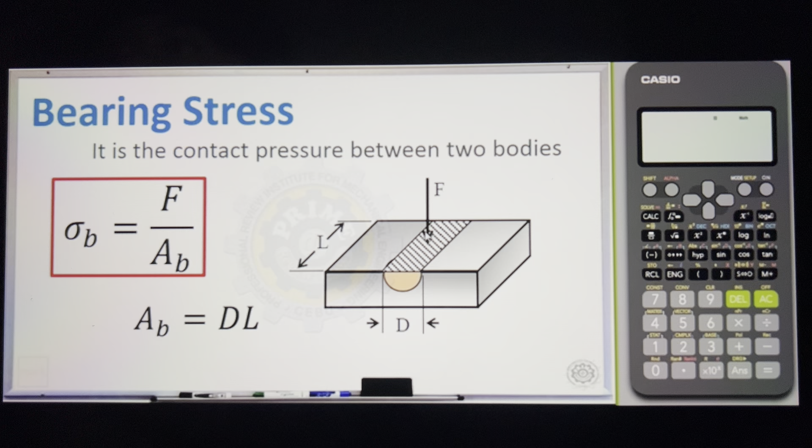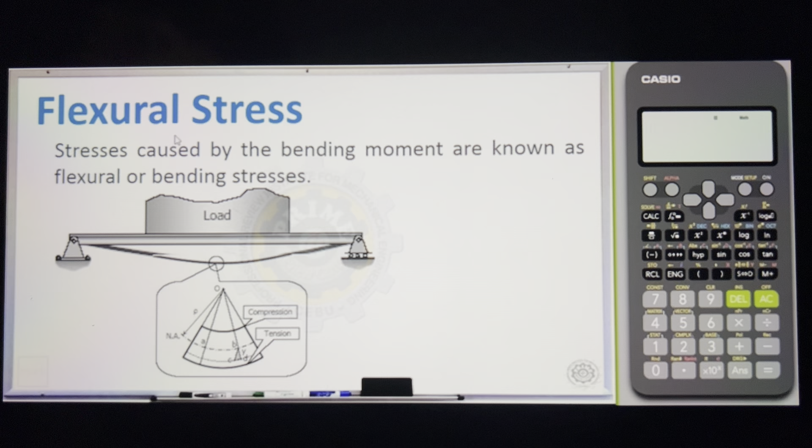Now let's move on to flexural stress. Another term for flexural stress is bending stress. It is the stress caused by the bending moment, also known as flexural or bending stress. So when we have a load here and our shaft bends, you have compression here, then tension at the other end.

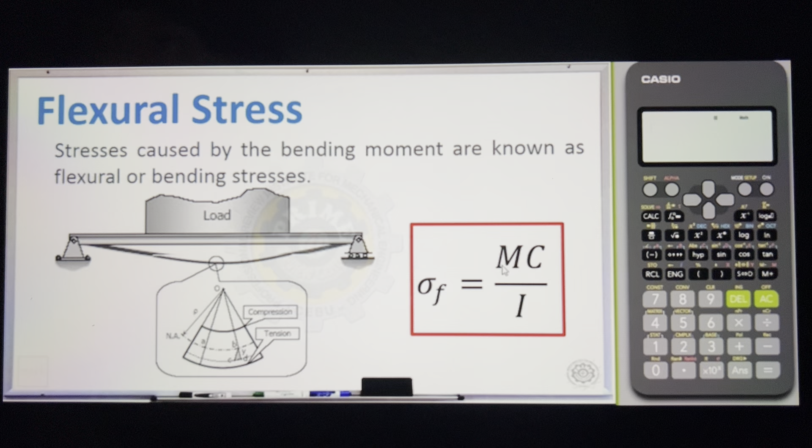The general formula for this setup, for flexural stress, is MC over I. This is the formula we'll use every time we encounter flexural stress. Let me elaborate on its parts. When we say MC over I, the M should be the maximum bending moment. The C is the distance from the neutral axis to the outermost fiber. And the I is the centroidal moment of inertia.

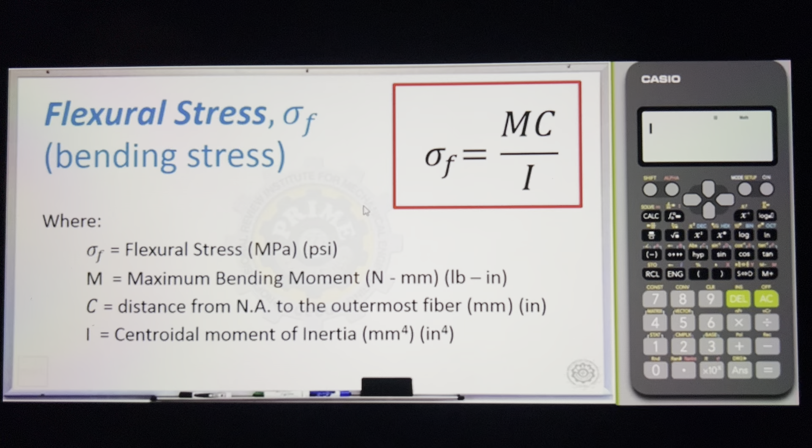It depends on the given, because the common given we expect is circular shaft or rectangular — those are the cross-sections we most often encounter. So for a solid shaft, our C, defined as the outermost distance from the neutral axis to the farthest fiber, is from the center to here — that's the definition of C. Mathematically speaking, C is the radius, which is diameter over 2.

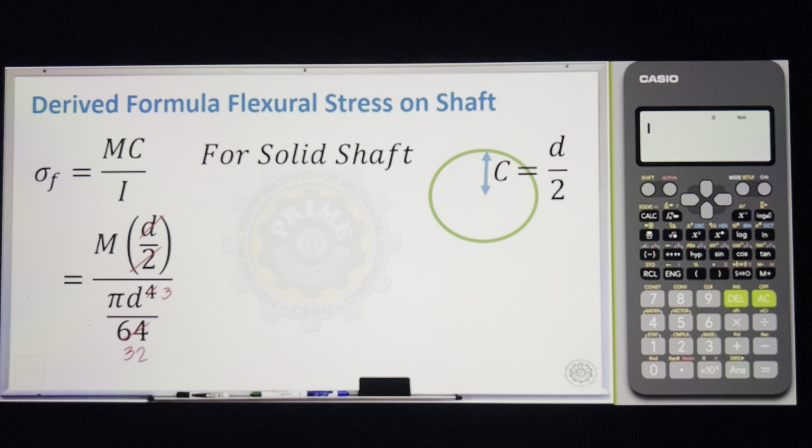The I of a circle is pi d to the 4th over 64 — please memorize this. If you simplify that, the diameter cancels out and becomes cubed, the 2 cancels out and becomes 32, and simplifying further raises it. So the formula we should memorize is 32M over pi d cubed.

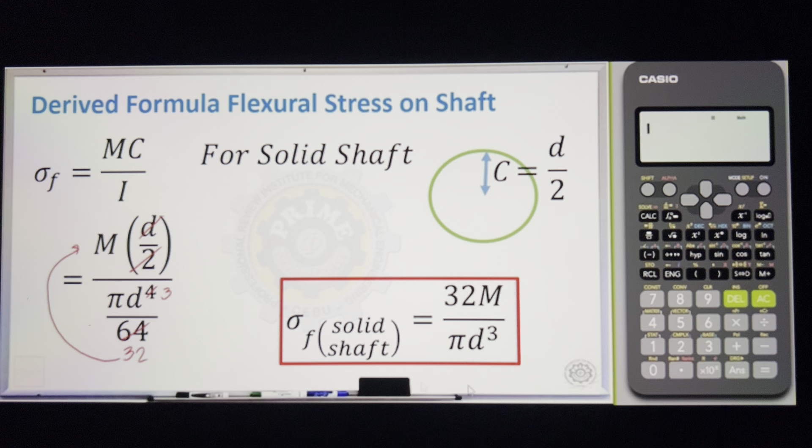So for circular cross-section, 32M over pi d cubed. For rectangular, 6M over BH squared. That's the concept of bearing and flexural stress.

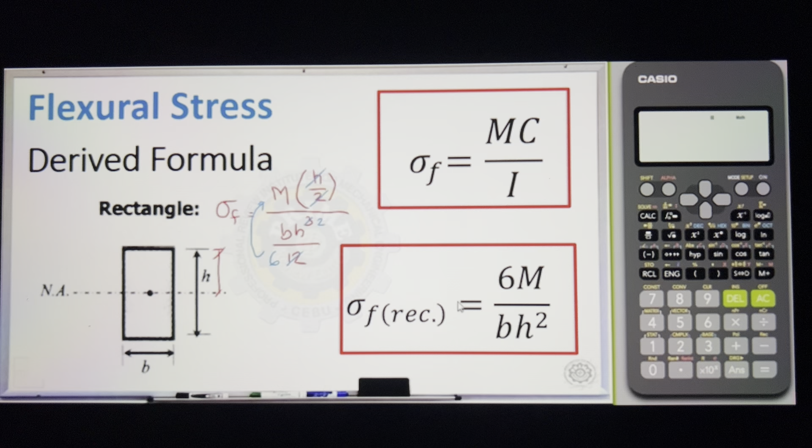Let's do a sample problem. Problem number 1: A simple beam, 8 meters long, carries a concentrated load of 100 kilonewtons at the midspan. What is the maximum moment of the beam?

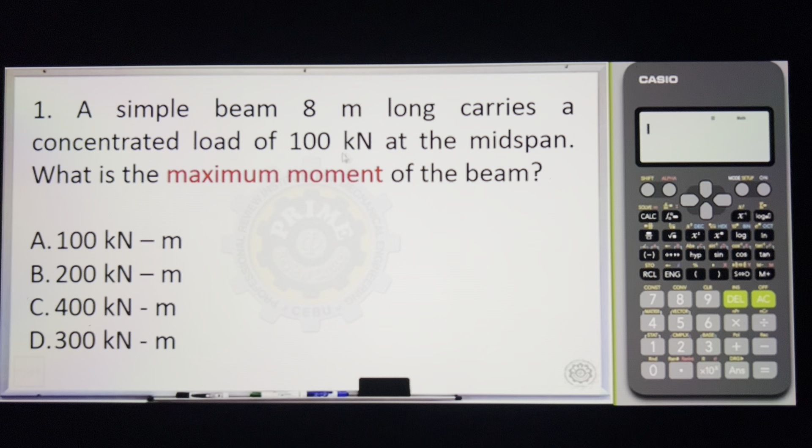For this kind of problem, we can solve the maximum moment using a shear and moment diagram. We need to visualize: you have a beam, 8 meters long, with a single concentrated load at the center, valued at 100 kilonewtons. So this is the illustration.

First, we need the load diagram. Since this is a simply supported beam, we have reactions on both ends, left and right. Applying logic, since the problem shows a concentrated load of 100 kilonewtons alone at the center, that means if there's support on both sides, they share it equally. So this must be 50 kilonewtons and 50 kilonewtons to balance.

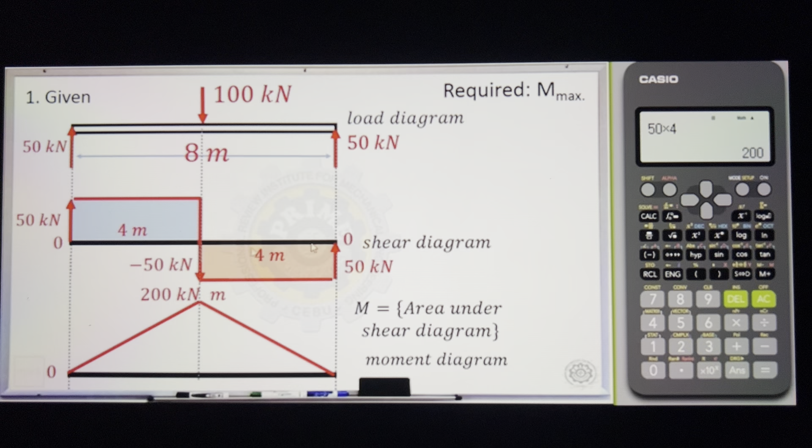Ang concern lang naman natin is the maximum moment. Nangyayari yung maximum moment under 0 shear. Kung titingnan niyo yung shear diagram natin, andito yung 0 shear, kaya katapat niya yung maximum moment. So, by observation na lang yan, ang maximum moment is 200 kilonewton meter.

But wait, there's more, kasi medyo mahirap ito eh. Kailangan lagi kang marunong ng load, shear, and moment diagram. Tapos mag-a-analyze ka pa ng 0 degree, first degree, and so on. So, it requires practice talaga. Pero pag natutunan, paulit-ulit lang naman yung principle ng shear and moment diagram. Kaya lang, ang other solution dito is simply memorize the shortcut.

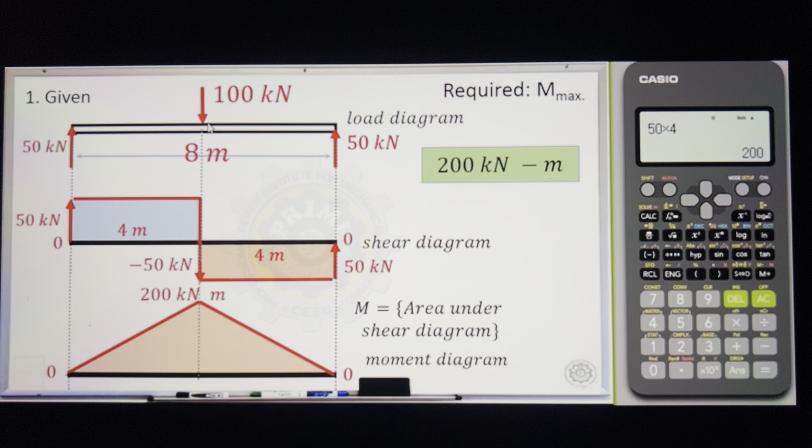Kasi yung mga common loading, may mga shortcut na yan regarding sa maximum moment. For example, you have a simply supported beam, tapos merong load sa gitna. Very common yung ganung loading. So, instead na mag-shear and moment diagram, tandaan mo na lang yung shortcut. Merong shortcut yung force na nasa gitna, tapos yun lang yung given.

So, tandaan natin is FL equivalent sa 4M. Okay, so palatandaan ko dito, pagkain foot long for me. Ayun yung palatandaan ko. Anyway, you can create your own coding. Bottom line, FL over 4. So, pag sinubstitute natin yung force na 100 kilonewton, yung length na 8 meters, divide mo ng 4. Makukuha nyo rin yung same result na 200 kilonewton meter.

So, pag may mga ganitong problem, mas magandang kabisaduhin na lang yung shortcut. Magagamit mo yung FL over 4 kapag yung load nasa gitna lang.

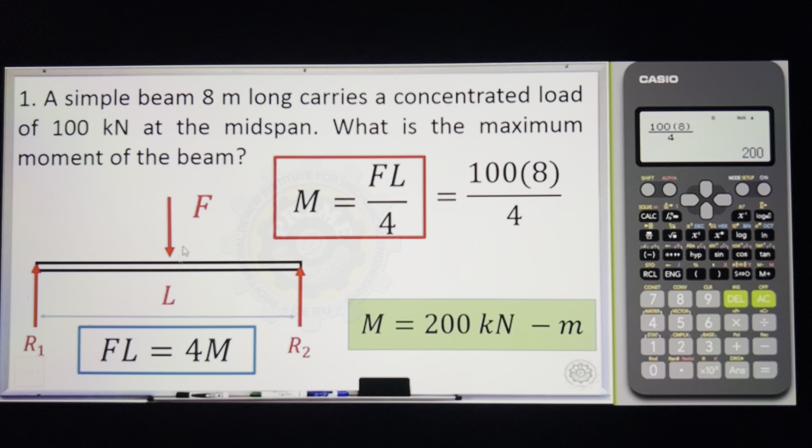Okay, ipakita naman natin yung other summary ng mga formula regarding sa maximum moment para hindi na tayo mag-shear and moment diagram. Ito yung katulad kanina na yung load nasa gitna. Ang formula natin is FL over 4. Nagkataon lang yung force is represented by variable P, kaya naging PL over 4. Kaya ang slope niya is PL squared all over 16 EI. And then, this is a derived formula para sa maximum deflection.

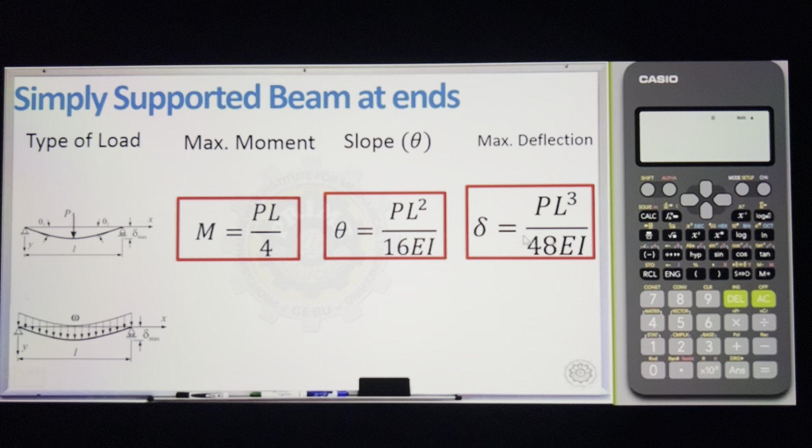Ngayon, ang madalas itanong is maximum moment, pero pwede rin tayong tanongin ng deflection. So, make an effort, i-kabisaduhin yan. Pag uniform loading naman, omega L squared over 8. Then this is for theta, and then this is for deflection. Again, focus tayo dito sa ating maximum moment.

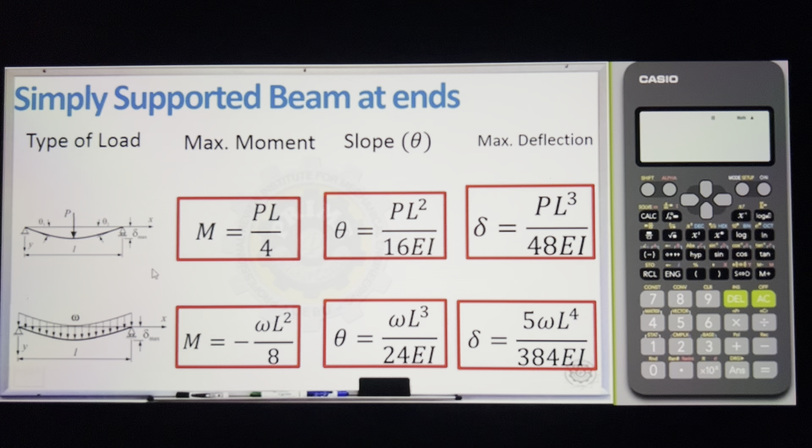Next, so pwede natin itong kopyahin, isulat sa index card para meron tayong summary. Now, what if meron tayong cantilever beam? Kapag cantilever beam naman, ito yung mga formulang kakabisaduhin. Again, pwedeng tandaan muna for the meantime yung maximum moment.

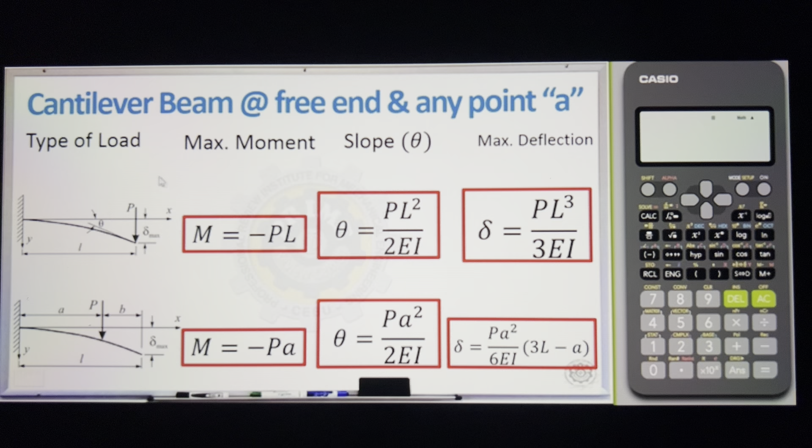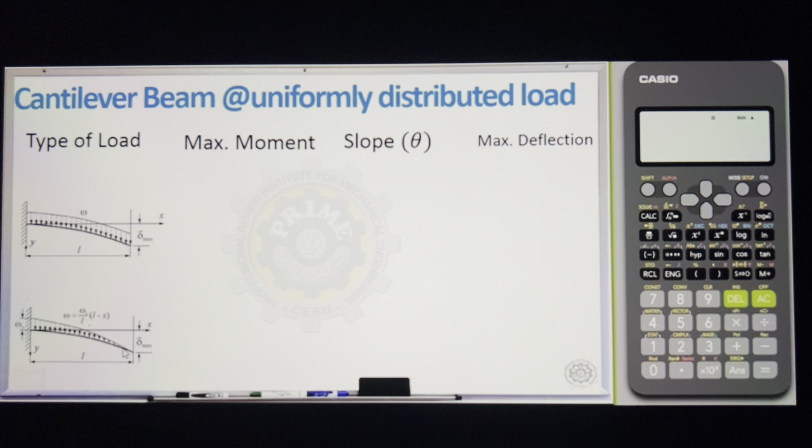Next, paano pag may cantilever beam tapos may uniform loading? Pinagsama-sama na. So kapag uniform loading na rectangular, ganito shape. Pag ang ating loading is triangular naman, ganito yung shape. So these are the derived formula. Again, dito lang muna tayo sa maximum moment.

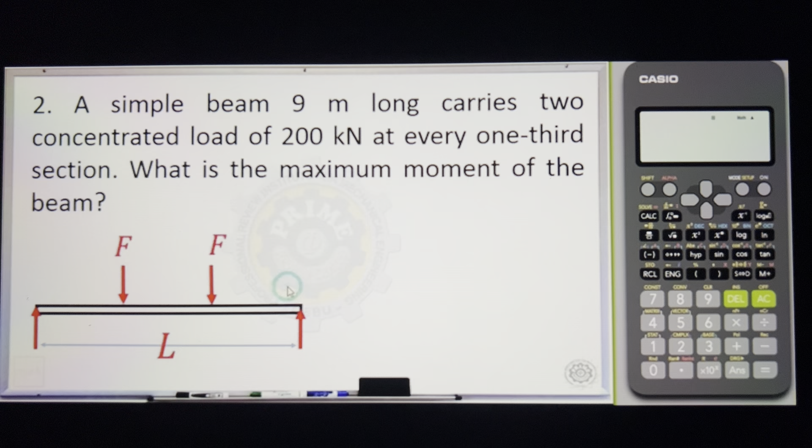Okay, sample problem tayo, number 2. A simple beam, 9 meters long, carries 2 concentrated load of 200 kilonewton at every 1/3. What is the maximum moment? So pag may nabasa kayong 2 load, nangyayari every 1/3, ang shortcut niya, FL over 3.

So, hindi ko na ipapakita yung shear and moment diagram, matagal. Tandaan lang yung shortcut. Magagamit yung shortcut na to para sa ganitong loading. Direct sub na lang. So, you have 200 multiply sa 9. 200 yung force, 9 yung length. Divide mo lang ng 3. So, ang maximum moment should be 600 kilonewton meter. So, this is problem number 2. Sobrang dali dahil may technique tayo, shortcut.

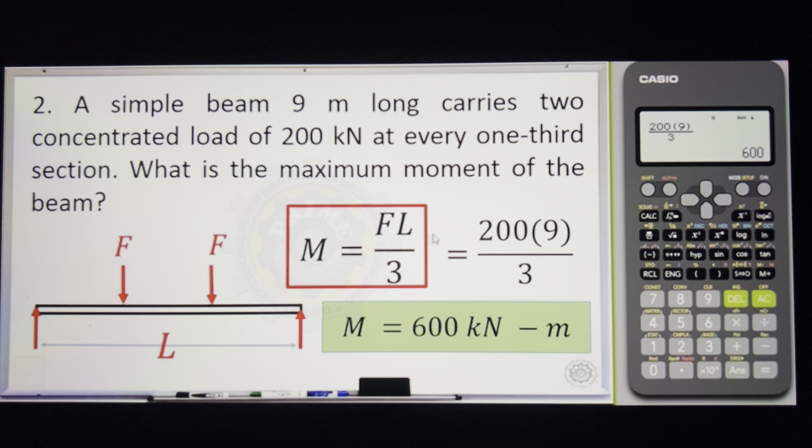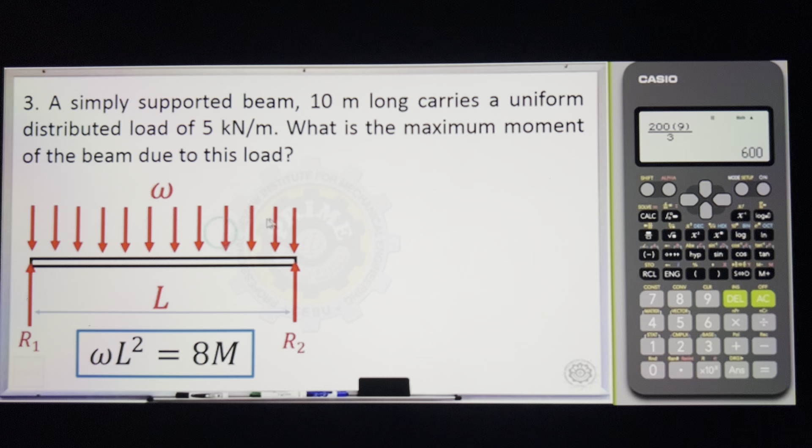Okay, isa pa, let's try number 3. Simply supported beam, 10 meters yung length, tapos merong uniform loading na 5 kilonewton per meter. Meron tayong shortcut dyan, yung pinakita sa inyo kanina, omega L squared over 8. Gamitin lang yung shortcut kasi matagal yung shear and moment diagram. Ang omega mo is 5 kilonewton per meter, ang length mo, 10 meters. Calculate na lang, so you have 5, 10 squared.

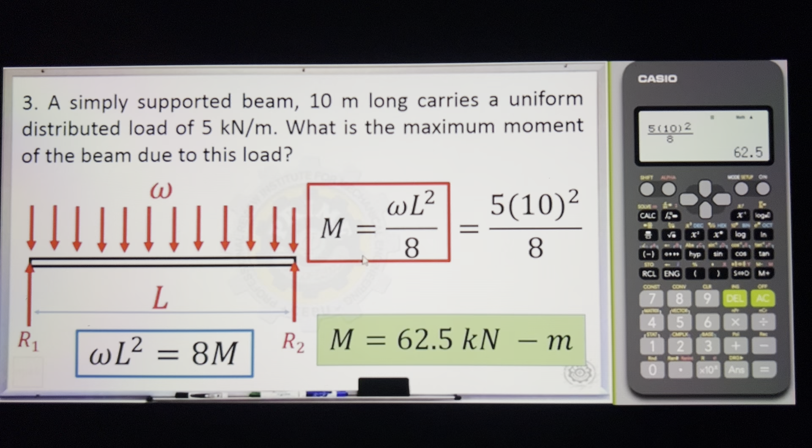I-divide natin sa 8. Madali lang, maiksi, basta kabisado yung shortcut. Ang maximum moment sa ganitong diagram should be 62.5 kilonewton meter. Pinapakita natin na sobrang daling mag-solve basta maalala lang natin yung tamang formula. That's it.